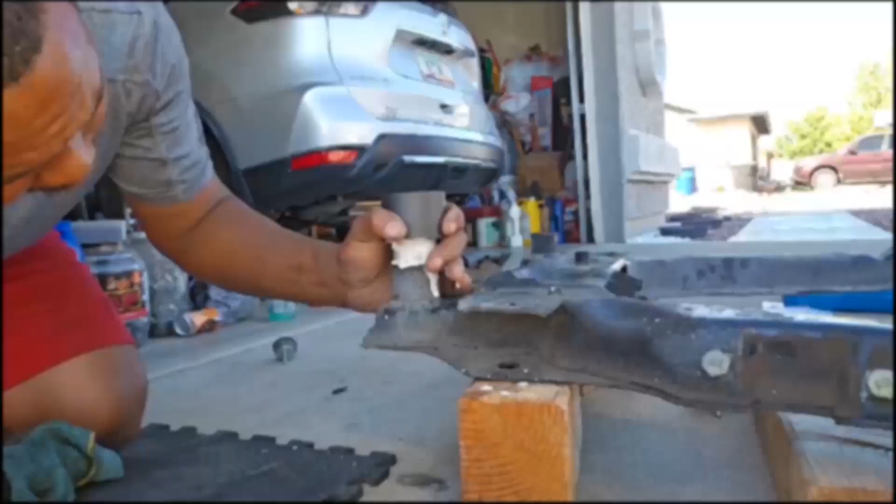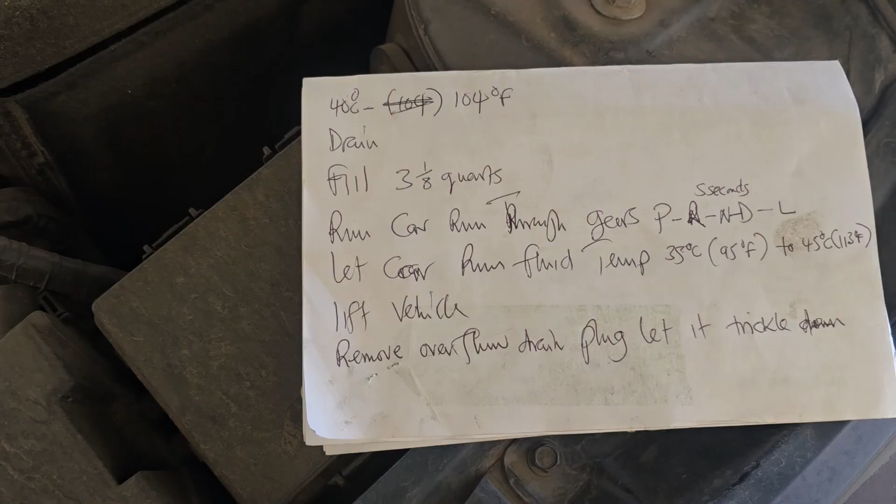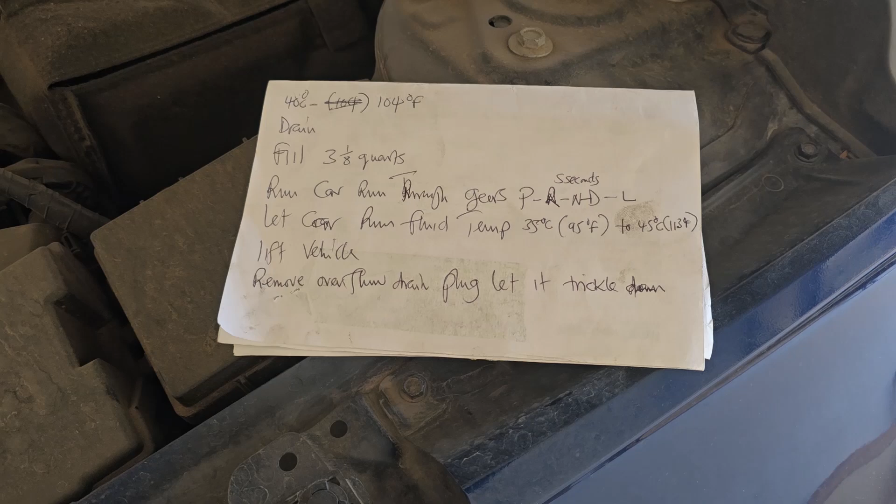So these are the few notes that I did take note of. In Arizona it's pretty hot, so there's a procedure you need to follow. We are doing this service in the driveway, so you have to make sure the car is on a flat spot in your garage, secure it on jack stands, and make sure it is even. I did measure this one with my measuring tape. I didn't write everything down, I just jotted the most important things.

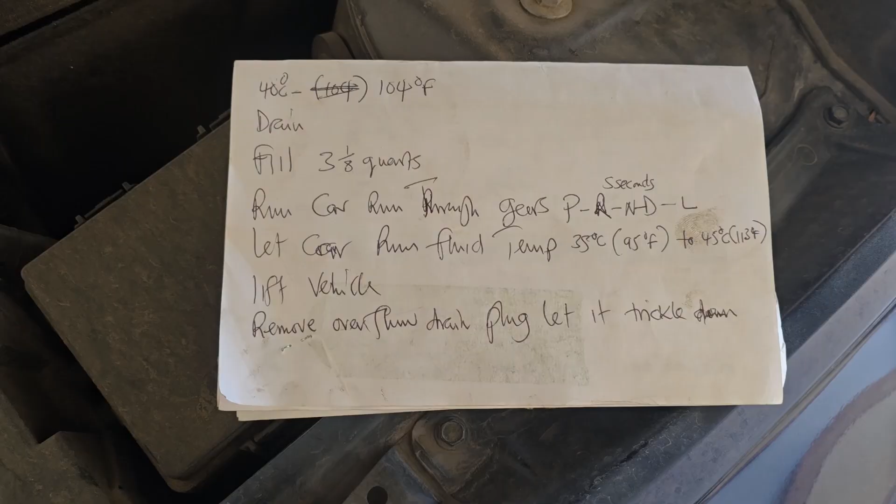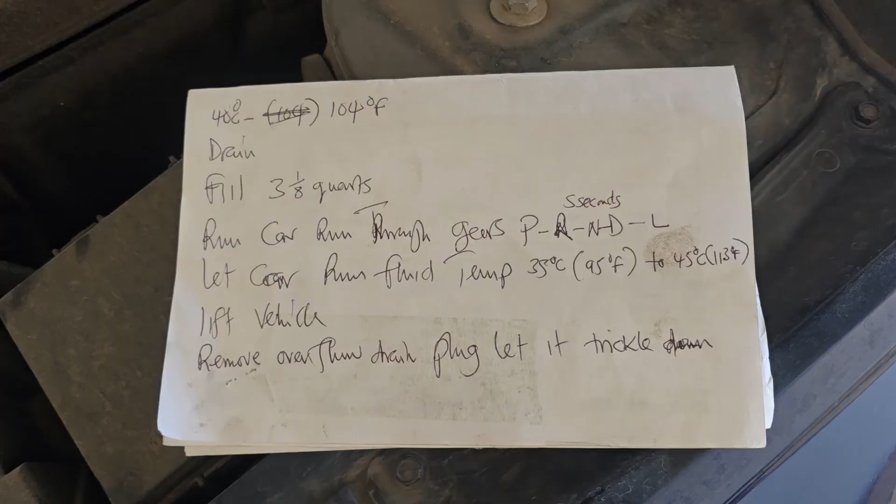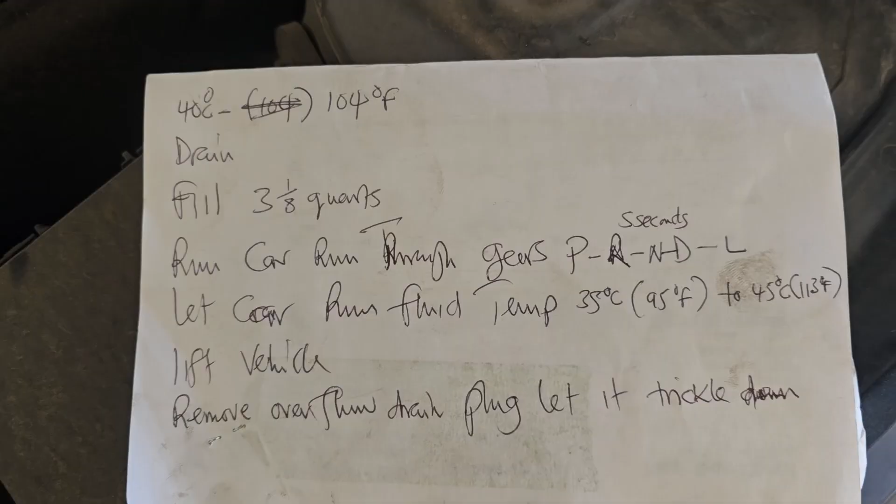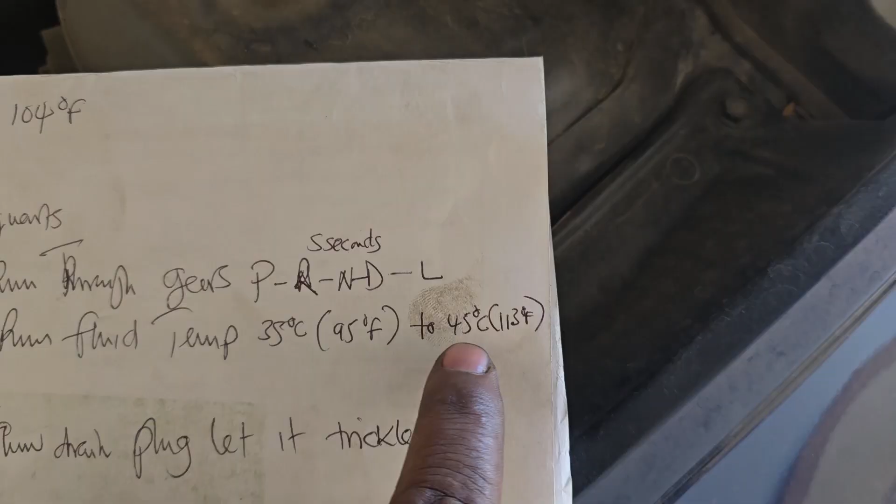We are supposed to run the vehicle to 40 degrees Celsius, about 104 Fahrenheit, depending on where you are, and let the fluid temperature get to that. Then we drain it, fill it up with the specified amount of fluid, and run the vehicle through the gears from park, reverse, neutral, drive, low, about 5 seconds split between the gears. Make sure your foot is on the brake pedal the whole time, and the parking brake should be engaged. That process cycles the fluid through all the gears. After that, let the car run until the fluid temperature gets between 35 and 45 degrees Celsius, or 95 to 113 Fahrenheit, depending on where you are.

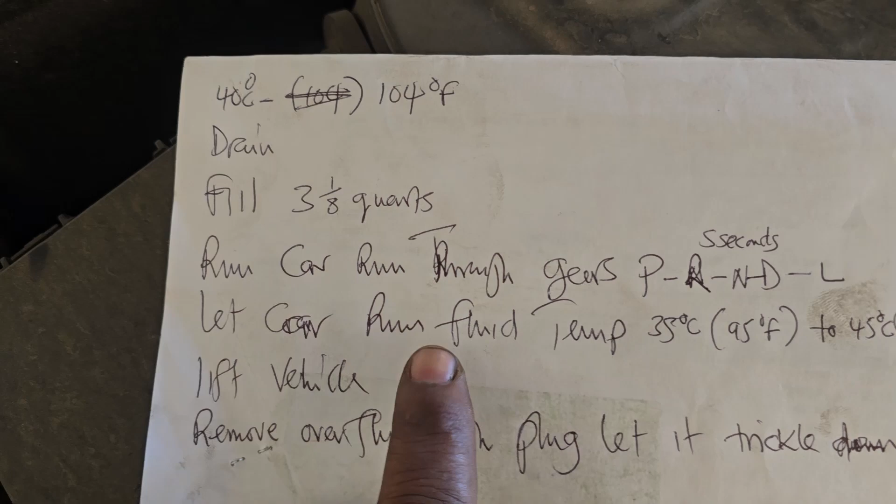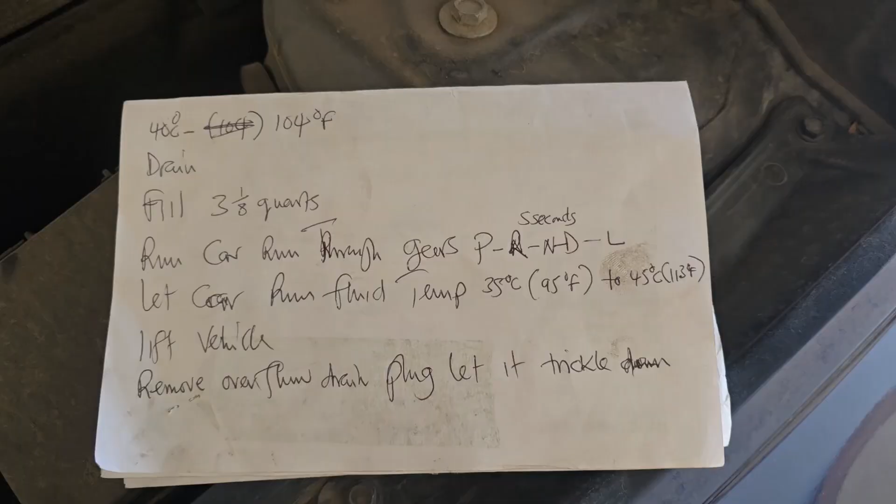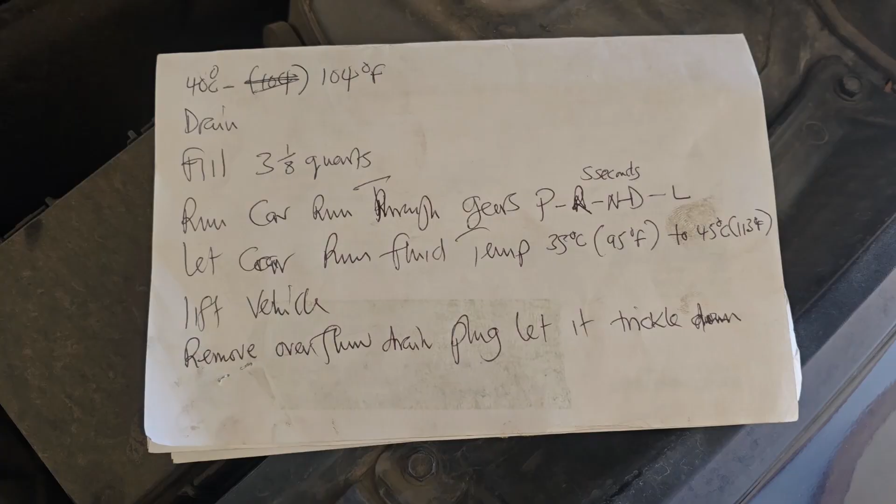If you're using a lift, lift it up. If you're using a garage setup like mine, you drain it from the overflow drain plug. So the first thing I'm going to do is drain it from the overflow drain plug so we see the trickle flow, and that's what we'll do afterwards. If you take it to the dealer, the process says to fill it from the draining plug, but in our case we're going to fill it up from the dipstick tube. Of course there's no dipstick, but there's that tube with the provision for the dipstick.

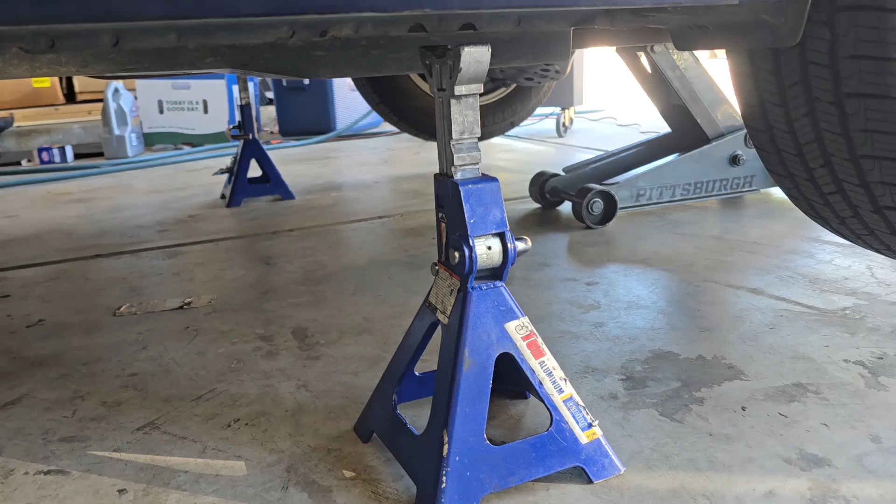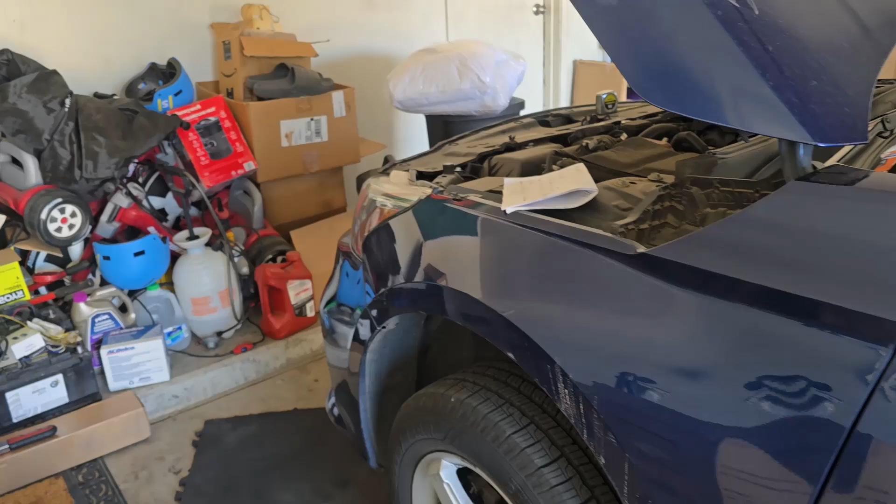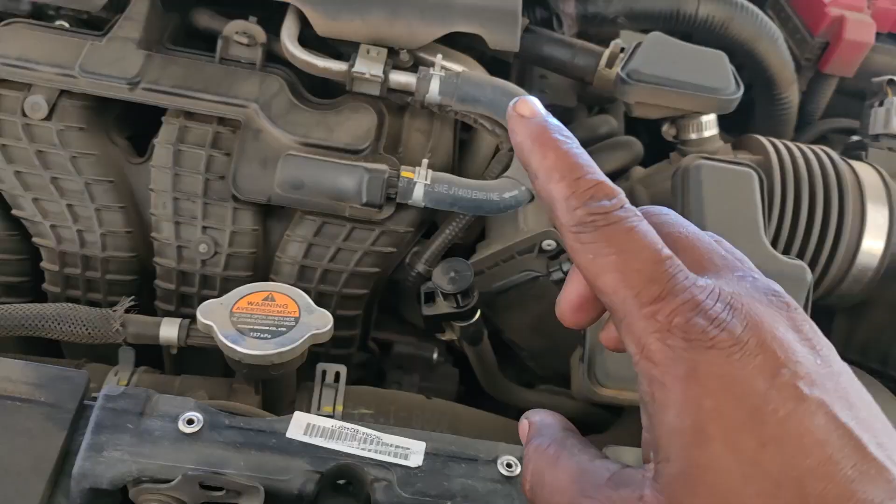So we don't need to actually let the car run. What I'm going to do right now is crawl under the vehicle and show you what we're going to do next. Before that, I'll show you how to take off the dipstick cover, which is here. First we take that out, then go under the vehicle and drain it. This is my measurement — I measured all 4 spots, and this is where we are right now. Let me show you how this comes out and then we go from there.

So I'm going to show you how to take off this dipstick rubber grommet or cover. This gives a lot of people problems. All you need is a tiny screwdriver like this one. In between the dipstick cover and the metal clip on the dipstick tube, there's a tab that you need to push, so you have to go in between that.

Let me show you. This is a metal piece for the dipstick tube, so you have to go in between like so, and then once you get that, push on the tab, and then you can actually take it off like so.

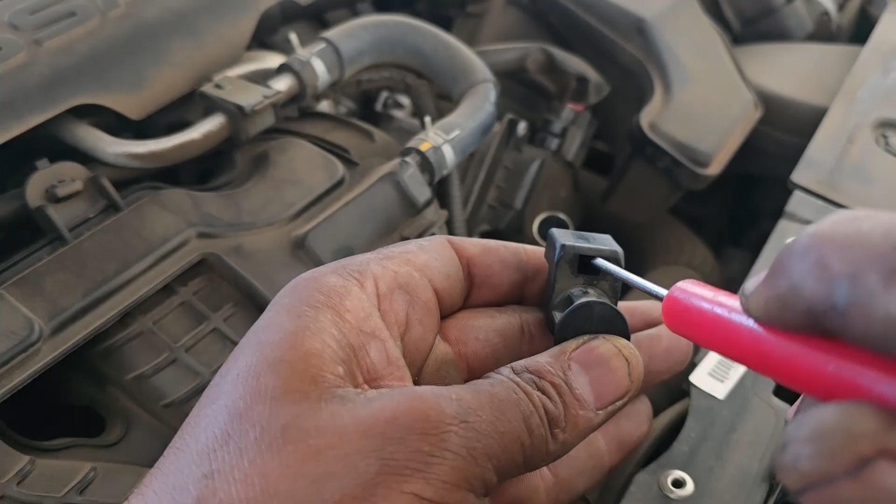So this is what I mean, let me show you. If you look right there, there is that tab right there, so you have to go in between right there, push it, and then pull it up. That's how it comes out. I'm just gonna put it just like so, and now let's go under the vehicle.

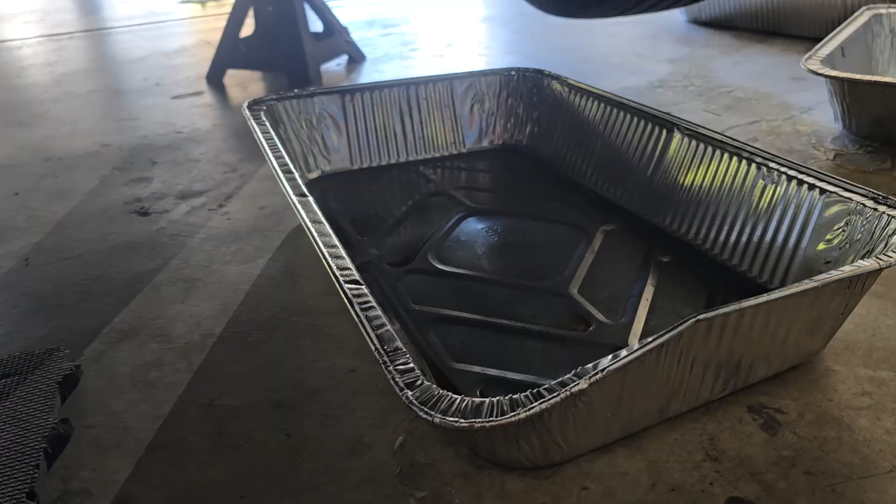We go ahead and start draining the fluid. What's up guys, so to drain the fluid I'm going to use my tin foils. I like these because we're going to measure the right amount of fluid we are going to take out. That's the amount we're going to actually fill this vehicle with. So let me set myself up and then we get going.

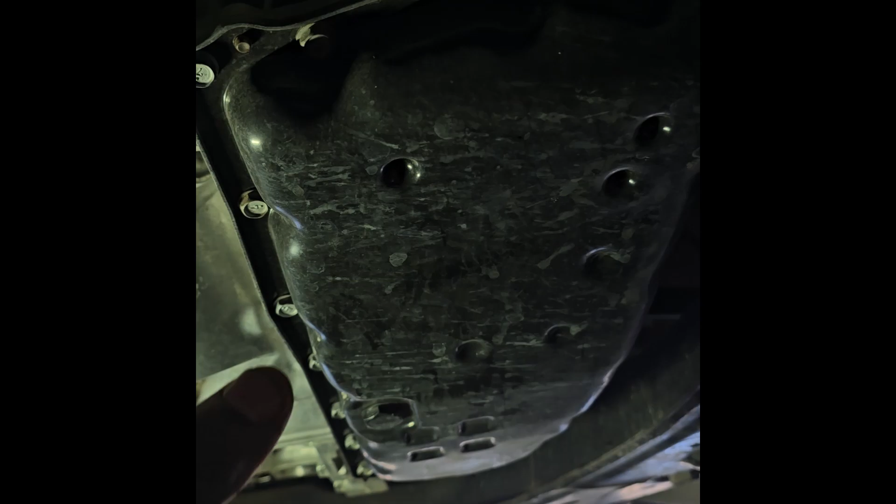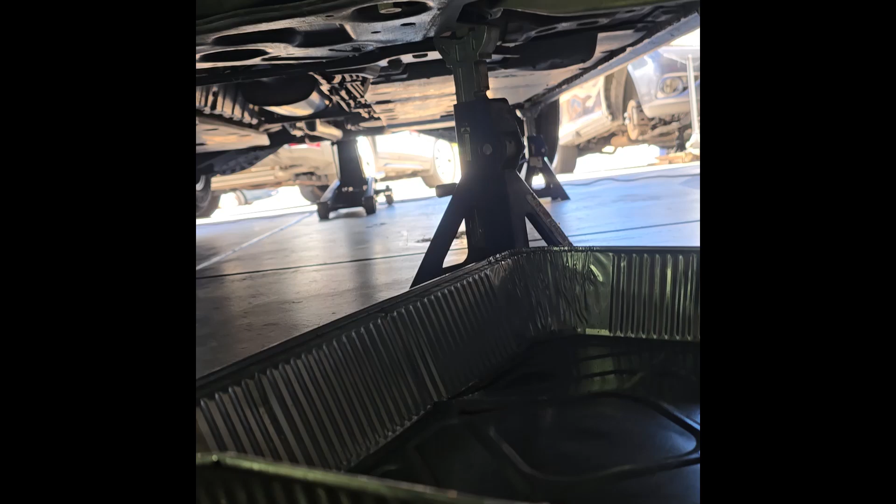I'm using my tin foils, so we'll measure what comes out, and that's what we're going to fill up the vehicle with. So the next service, there's a filter in here. You have to take the transmission pan out, and then there's another filter right here, a couple of 10mm bolts, I think 4 of them. So the next service we're going to service with the filters.

For now, let me set myself up, and then we drain. We'll start with draining from right here so that we can watch the trickle flow from here, so that when we fill it up, we actually correspond with what the flow will be. Let me set myself up and then we get going. This is a 14mm bolt, this is the one right here, and we're going to use a 14mm socket with the ratchet.

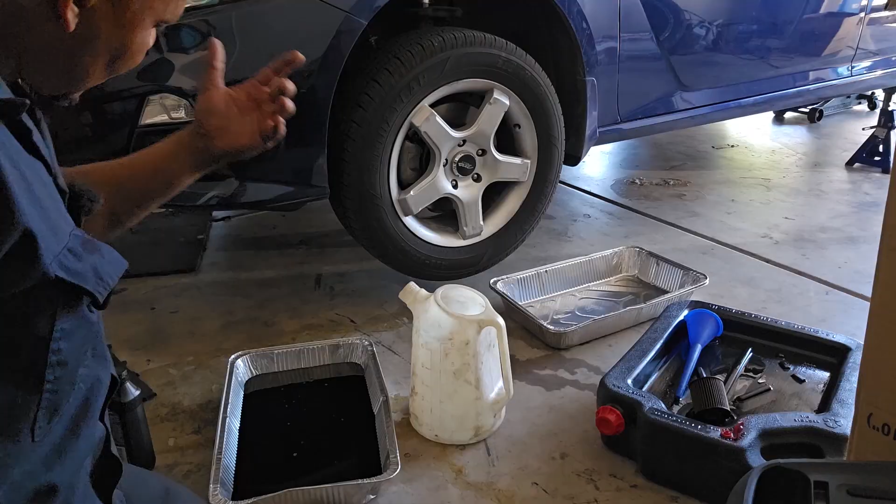What's up guys, so right now you can see I got my jar right here, and this is the fluid that came out of the vehicle. Look how black it looks, and now you're going to see the difference with the new fluid. So right now I'm gonna pour this into the jar, I'm gonna take my time, I don't want to spill anything.

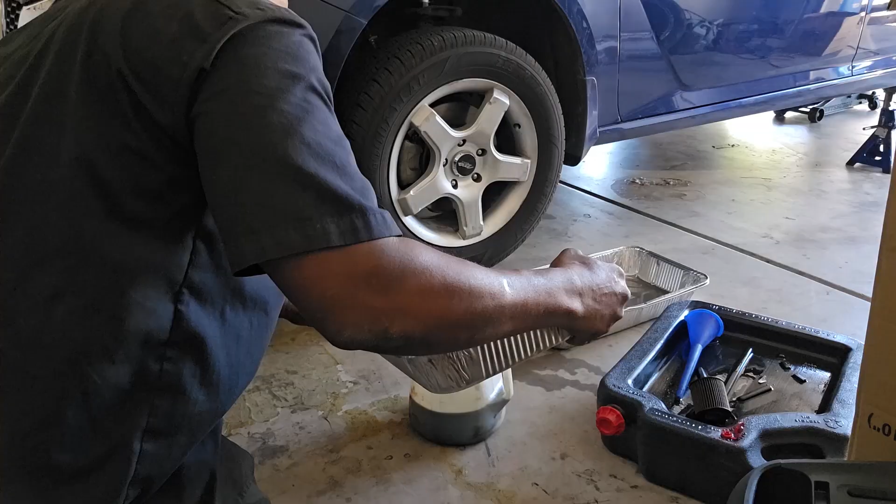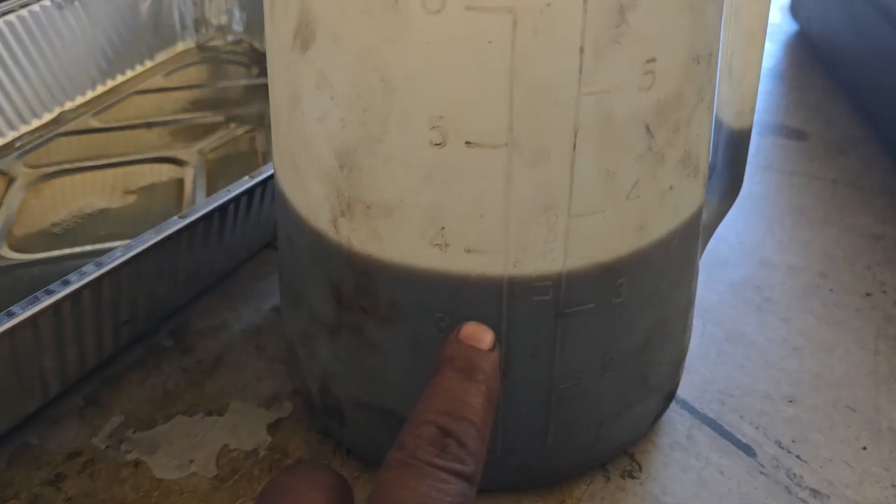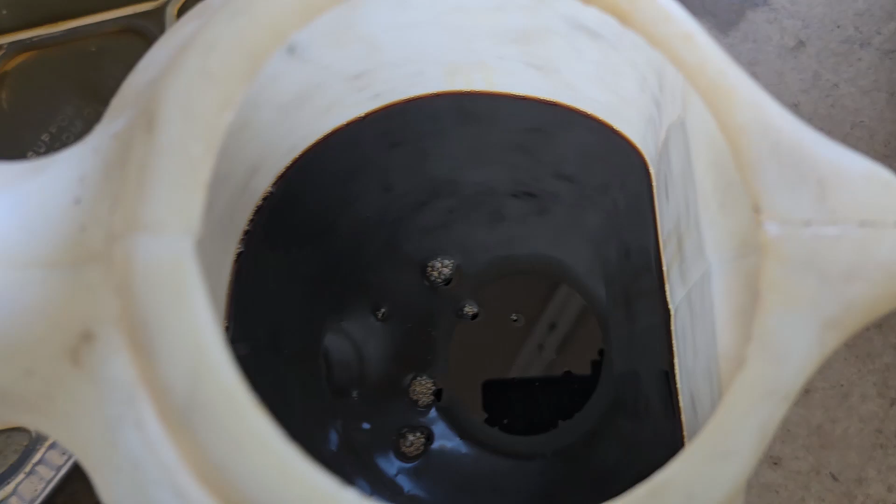What's up, guys? So this is how much we got, which is about 3.7-3.8 quarts right there. You can see how nasty this fluid is, so dark, so brown, looks like chocolate. Let me dip my finger so you can actually see how brown it is. The new fluid will look a little bit different, fresh, and it will look reddish. So this is how much we actually got out of the vehicle. We'll fill it up with the same amount, and then we'll go from there.

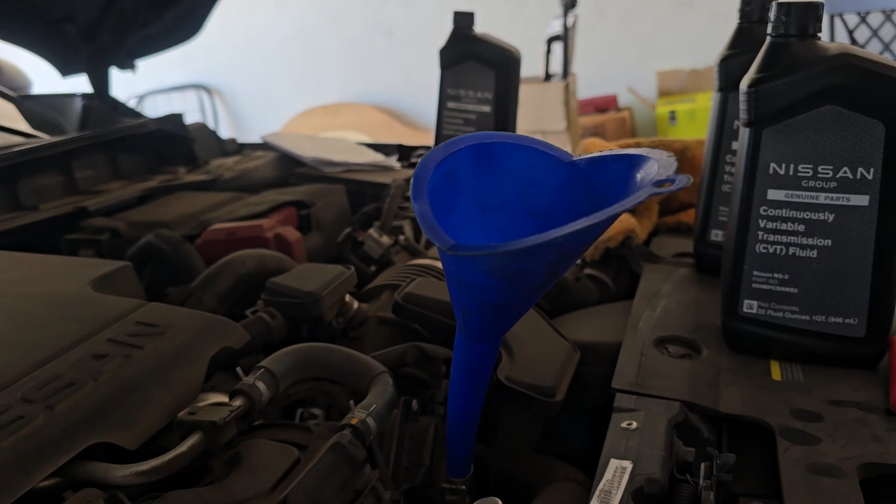What's up, guys? So it's time to fill up this vehicle with the fresh transmission fluid. I always recommend, if you're doing this service, just use the genuine Nissan transmission fluid from Nissan, and that's the NS3 right there. So make sure you grab some from the dealership.

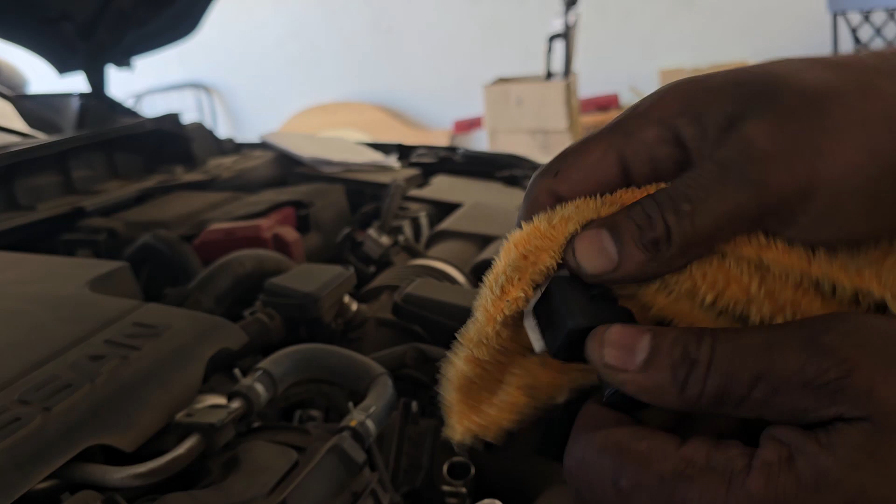So we put 4 quarts, and we are going to take off our funnel just like so. We're going to wipe our dipstick down, put the cover back, and then we are going to actually plug it in.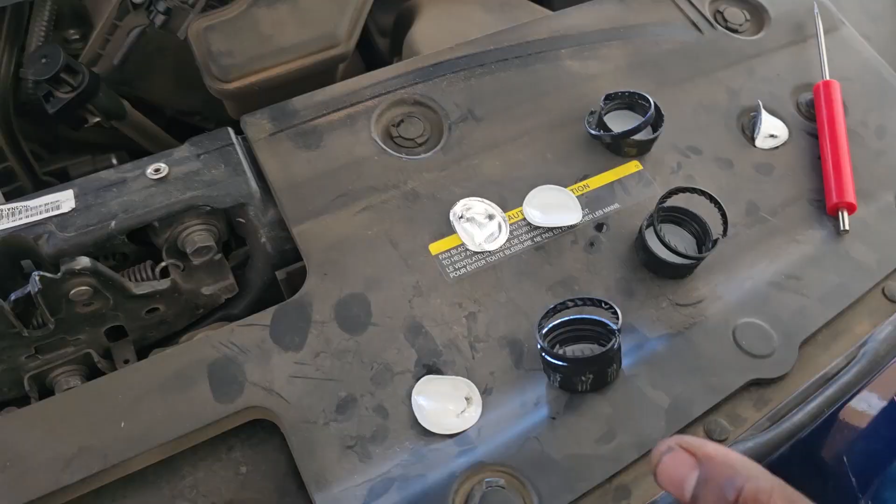So the one thing I just want to point out, make sure all the containers are sealed with these sealers after you take off the cap, to make sure you got the right amount and you got a solid bottle right there. So right now I'm going to go inside the vehicle.

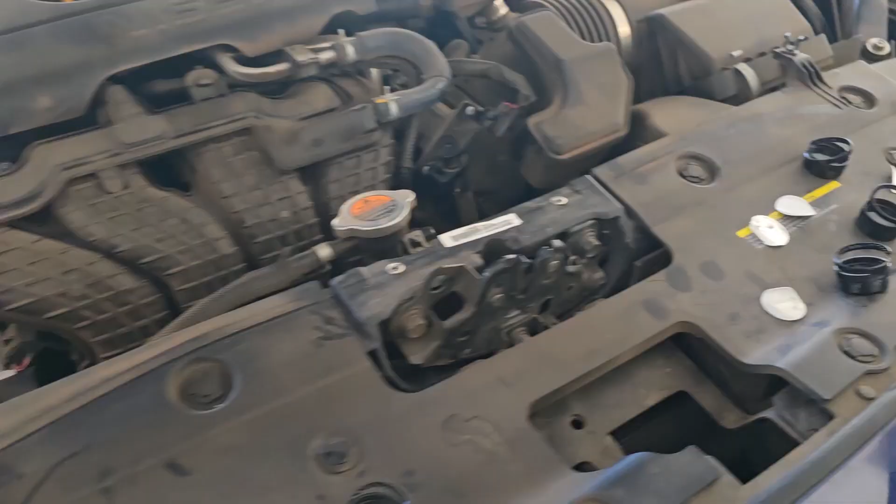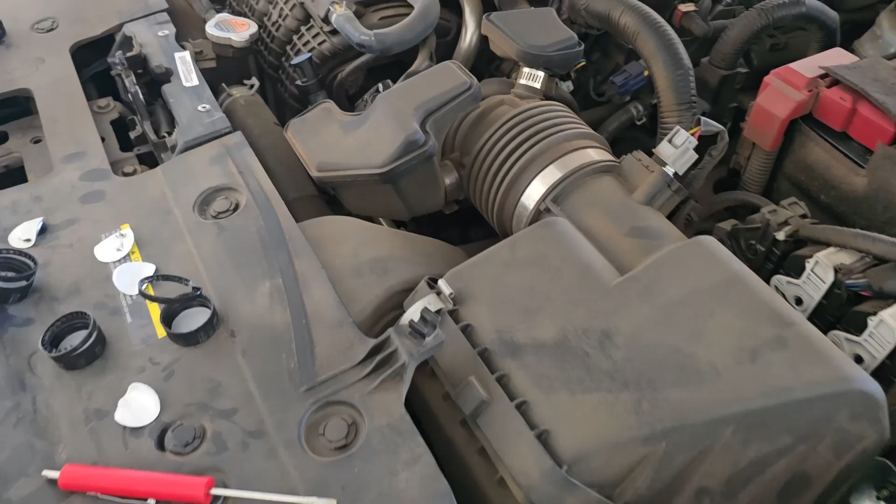We'll run the vehicle, cycle through the gears, one foot always on the brake, and then we'll let the car run until we get to about 45 degrees Celsius, which is 113 Fahrenheit, and then we are going to drain off some fluid. We watch the trickle, and then we'll know where we are from there.

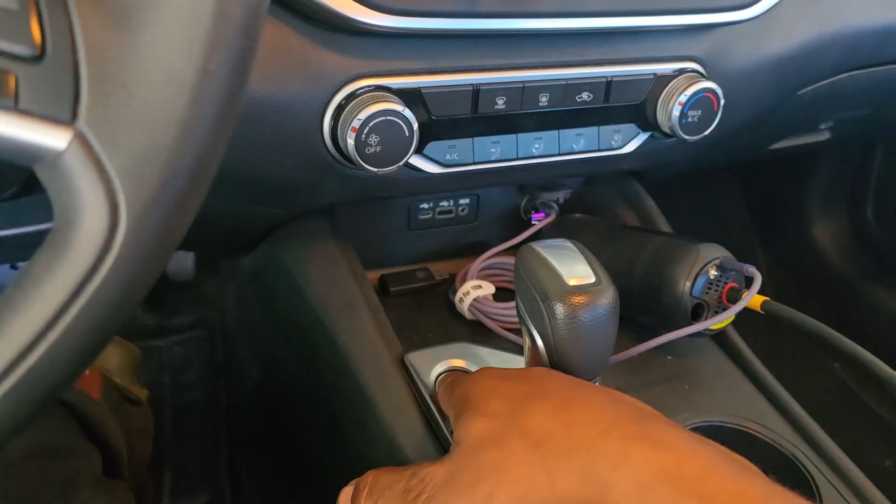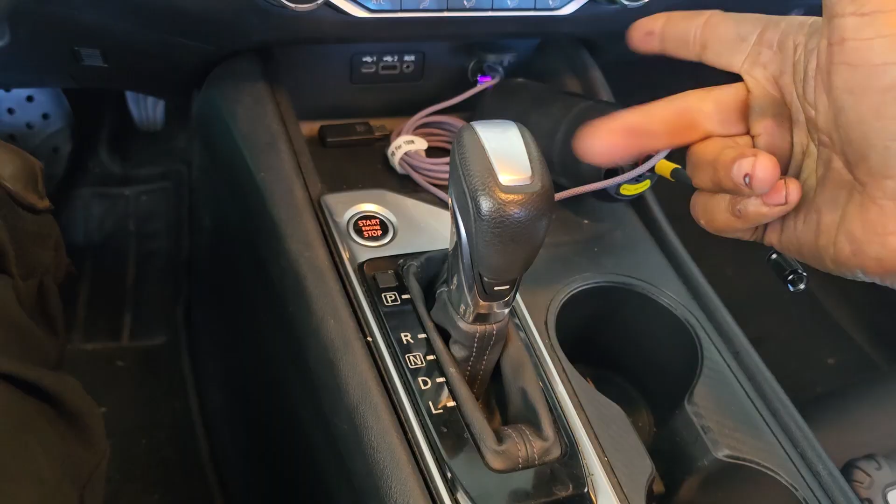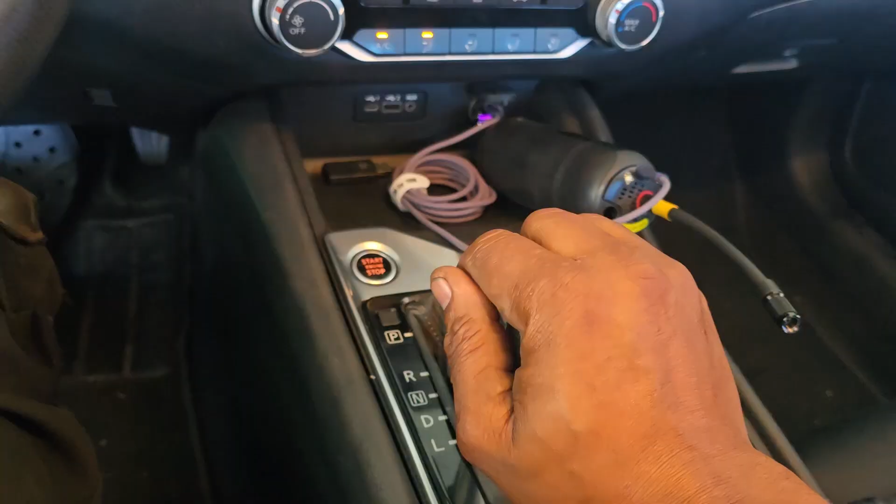What's up, guys? So right now I'm in the vehicle, foot on the brake, and then we'll start our vehicle, and cycle through the gears from park to reverse, counting 5 seconds each time. Then we go to neutral, do the same thing, then drive, then low, counting to 5 each time. Then back to park, and we cycle through one more time to reverse, counting 5 seconds each time. You can do this a couple times, but for now that's all we need to do. We've cycled through the gears and made sure the gears are shifting, and that's all we needed.

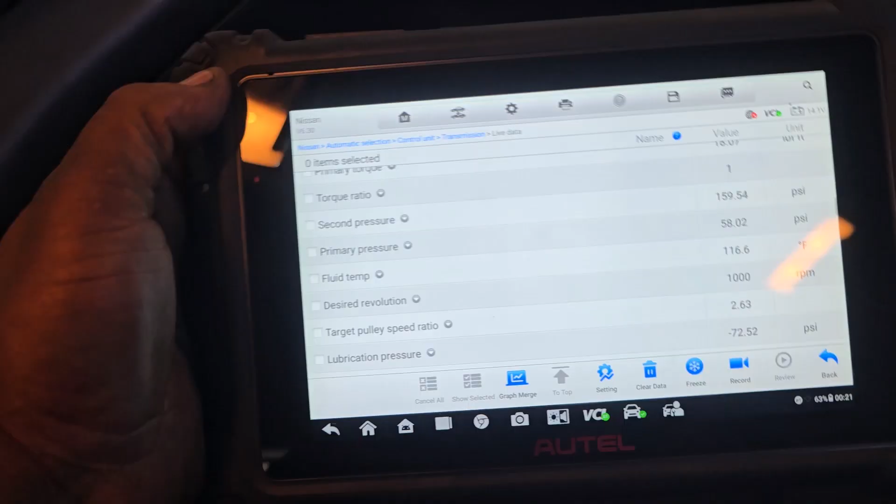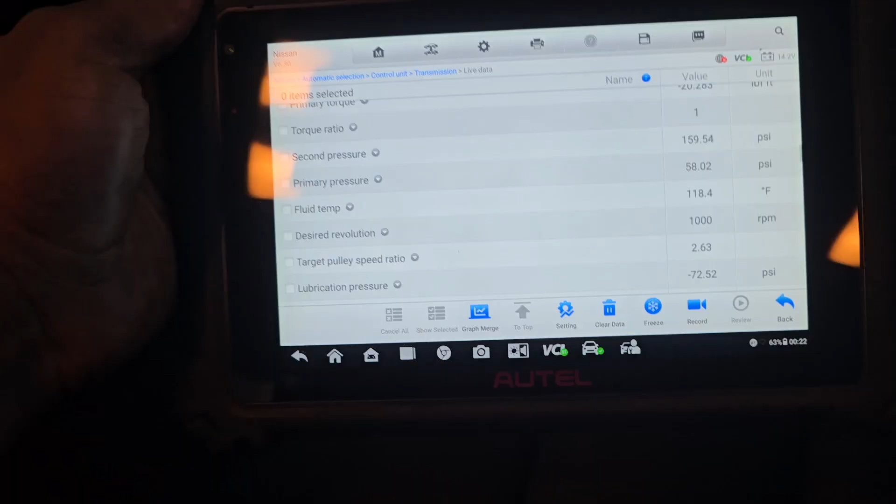So what we're going to do is watch the temperature for the fluid, which is right here. We're supposed to get to 113, and we are at 116 right now, 118. So we just go down the vehicle, and we are going to drain while the car is running, and then we go from there.

So while the car is running, we're going to drain from the filler port right there. That looks okay, so go ahead and put back this plug. It should be good right there. It's the same flow as before.

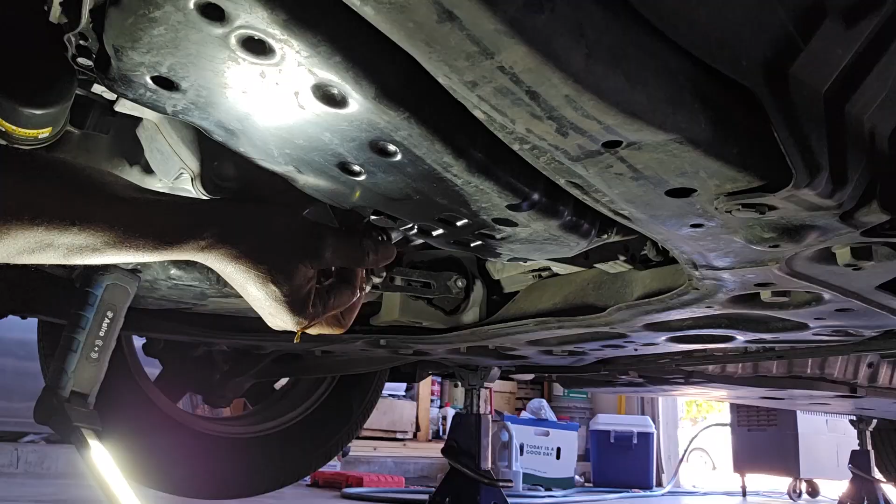And all we've got to do right now is tighten that bolt, and we should be good to go. Wipe off all the excess oil and make sure you got no leaks. In our case, everything looks good, and that's pretty much all you do for the CVT transmission service, especially the first one.

Without changing the filters on the 2019 Nissan Altima.